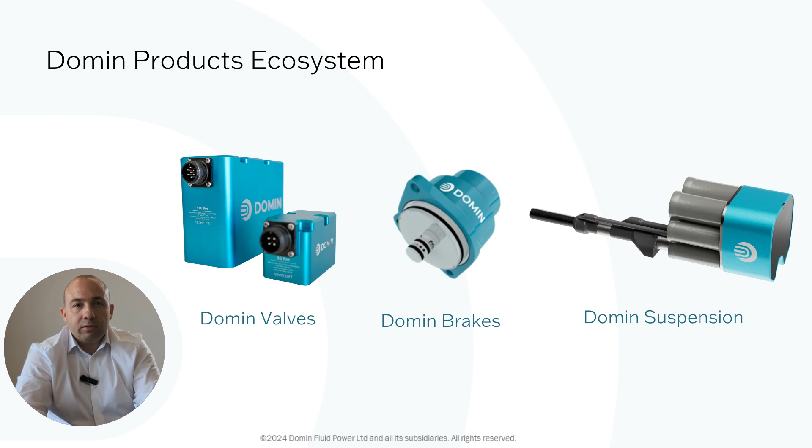But today we will dive into the detail of the Domin servo proportional valves. In the last 4 years, our workforce and production has doubled every year to meet the high demand for our products. To sustain this growth and maintain our high standard of quality, we have opened a new factory located just 20 minutes from the center of Bristol. At the heart of the Domin Technology Center is 3D metal printing.

Already in 2019, when Domin started large-scale production, we became the first company to produce a standard metal print product for industrial use. Now we are capable of producing 50,000 servo valves every year. Now I hand over to Cameron.

He will show you our servo valve products in detail. Thank you very much for the introduction, Alessandro. My name is Cameron and I'm one of the sales managers here at Domin. Alessandro talked about a few different types of products and systems that we're currently developing here.

But for today, we're going to be focusing specifically on our line of high-performance servo proportional valves. So today, we're going to explain a little bit about why we chose the servo valve to be our first product. Within the marketplace today, companies and customers have a choice between two competing types of technology.

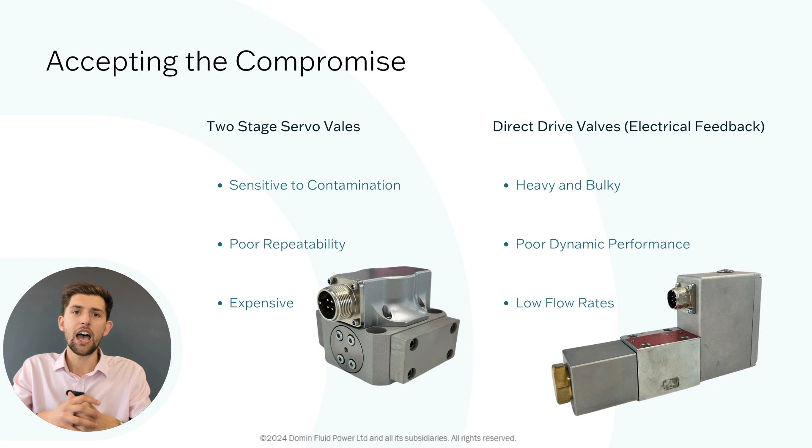So currently, customers and end users have a choice between two products and they have to accept the compromises that come with them. At Domin, we saw this as a great opportunity to harness advanced manufacturing technologies and new design systems and engineering methodologies to create a product that had the best of both technologies, but without the compromises. And this is where we are today.

We're able to provide a servo valve solution that has the performance and characteristics required both for the high performance environments and the reliability needed for the harsher industrial environments. On the screen here is our S6 Pro, which is our NG06 or D03 valve.

In terms of how this valve compares to an equivalent direct drive valve sitting on that pattern already available in the market, we've created a solution that is 70% lighter and is capable of step responses that are 67% faster, and at the same time operating at bandwidths with potential over 300% higher than what's available today.

Now at the same time as having this greatly improved performance, you'll see that it's substantially smaller. This valve, the S6 Pro for example, literally sits in the palm of your hand and is able to achieve a rated flow at 70 bar pressure drop that's 50% higher than what's available today. So moving from 40 litres per minute as the standard maximum rated flow on a D03 up to 60 litres per minute, which is a substantial increase.

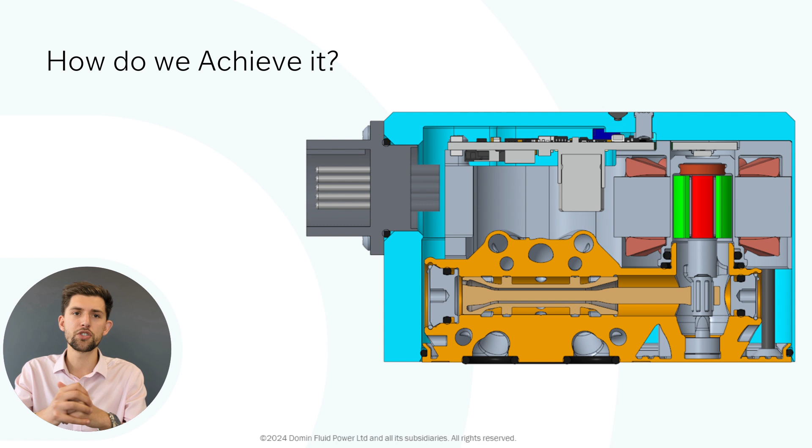So the next question really is, you've seen what's possible, it's how do we achieve it and what are those key contributing technologies? On the screen here, we've highlighted 5 key enabling technologies that have got us and the product to where we are today. The first being digital state-of-the-art electronics.

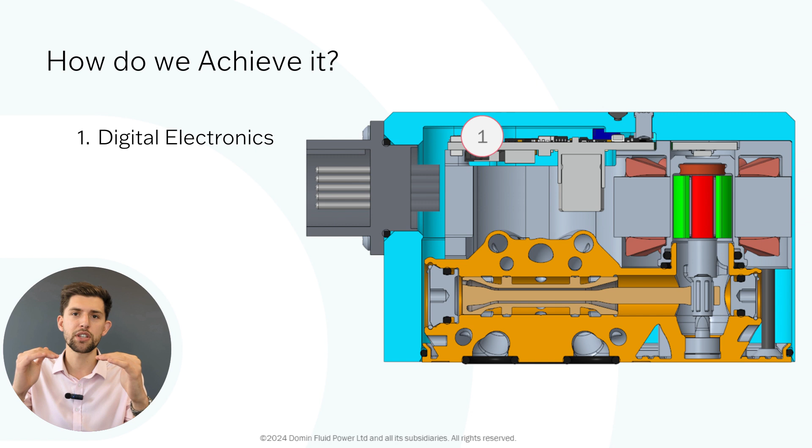So moving away from having large electronics housing on the side of the valve to a slim, very modular PCB approach that sits directly within the housing of the valve, as you can see on point 1 of the diagram.

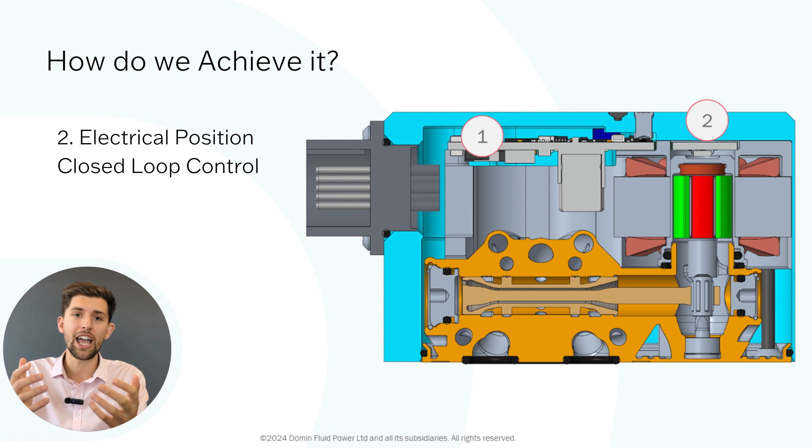Secondly, we've moved to an approach that harnesses electrical closed-loop position control using magnetic Hall effect sensors. Most direct drives today use large, bulky linear position transducers with relatively average resolution and performance, whereas we're able to harness the benefits of magnetic Hall effect sensors that are both very, very tiny, weighing only a couple of grams - on this diagram, for example, most of you can barely see it. At the same time as being so small, the resolution and control accuracy we can achieve is far greater.

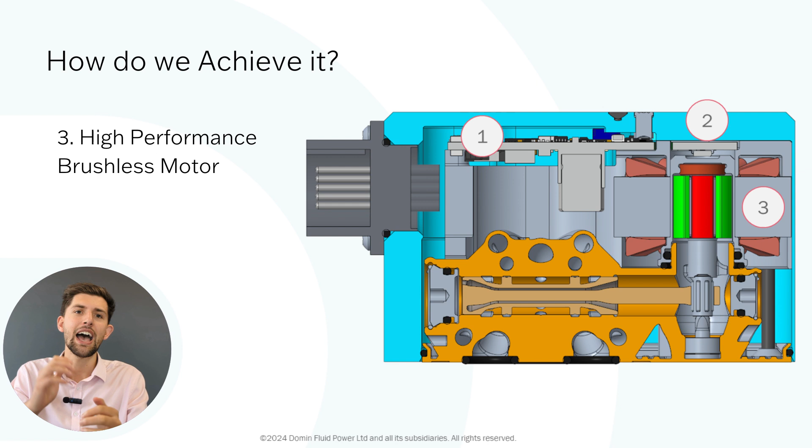The third key enabling technology is using high-performance brushless 3-phase DC motors as opposed to a solenoid drive, which is the standard today. These motors enable us to achieve a high amount of torque for the same given electrical input, which enables us to control the valve both at high pressures when the flow forces on the spool are great, and maintain accurate control at high frequencies.

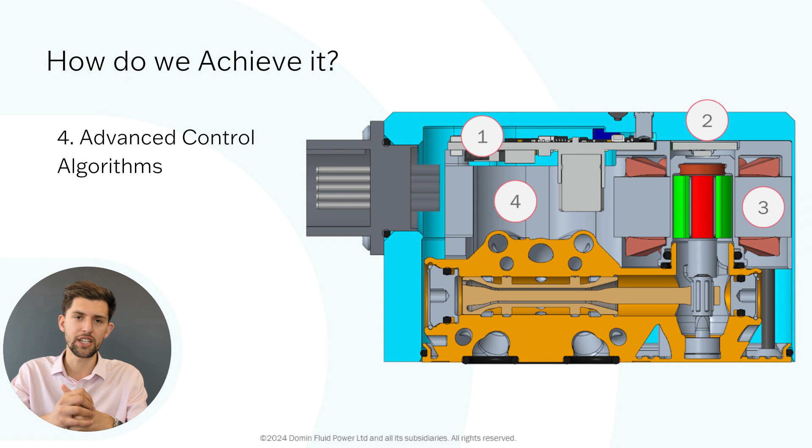The fourth point, which is linked to point 1, is our advanced control algorithms and firmware. These algorithms enable our products to keep up with the highest demands in terms of step input speeds and frequencies, to minimize overshoots and maintain very accurate, repeatable and precise control.

Fifth and finally, which is something Alessandro alluded to earlier, is our use of metal 3D printing within the valve. Within servo valves, we have a patent here at Domin which protects our use of additive manufacturing within a servo valve design. On this cross-section diagram, you can see the orange component, which is the manifold. This is one of the components manufactured using metal 3D printing.

You can see just by looking at the geometry of the valve itself, we're able to use simulation tools like CFD to determine the optimum flow galleries to minimize pressure drops and optimize flow rates. Thanks to the flexibility the manufacturing technology gives us, we can actually create and manufacture a design that is as close as possible to the optimal results using the technology currently available.

Additionally, something you might notice is the wall thicknesses are very thin within the manifold. So again, taking advantage of another simulation tool, FEA - finite element analysis - we can identify the minimum amount of material needed given the operating conditions and pressures the valve has to withstand, and then only print material that has functional properties, so withstanding stresses. As a result, there is very, very little wasted material.

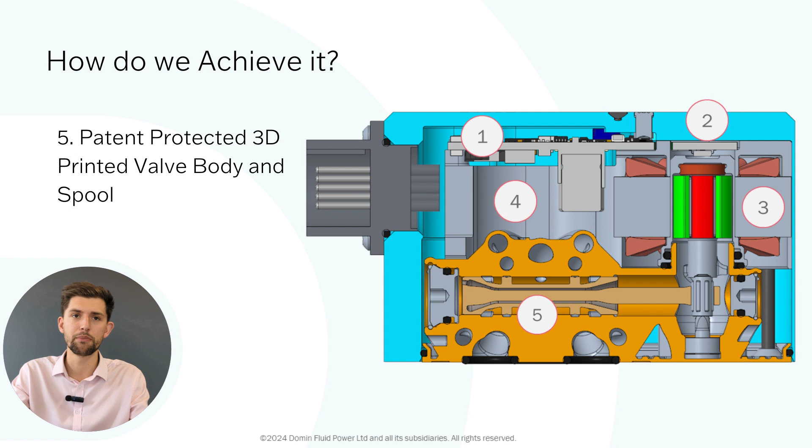So now we know we can create great products and we've explained how we do it. I think the next step is to talk about what this actually means for our customers in terms of outcomes. Over the past 5 years, we've supplied these valves into a wide variety of industries and applications, and we've seen approximately 3 key major improvements in summary.

The first, being something we've alluded to already, is obviously improved performance - so higher capabilities in terms of dynamic performance, flow rate, optimizing the size and the weight through our innovations, and advancing our product quality approach.

The second has been creating a product that removes failure-prone features and has very high contamination resistance, and as a result, improving the reliability of the product. For example, our products have no seals in contact with high pressure fluids, and we have no need for an additional filtration component. Additionally, we do not have a pilot stage. As a result, because we've removed these failure-prone components, our valves are lasting substantially longer in service and are proving to be very robust.

So because our valves are lasting longer in service, our customers are having to spend a lot less time and money on things like routine maintenance, repair, and flushing. Additionally, because the valves are longer in service, the machines can be more productive - you can create more with the machines, do things more frequently, and overall be more profitable as a company using our products.

Additionally, something we're going to cover a little bit later is energy consumption. Simply by removing the pilot stage, we're able to drastically reduce the leakage and reduce the power consumption of the hydraulic systems. For example, when replacing a 2-stage valve with the S6 Pro, an NG6 around 60 litres per minute in terms of flow, we convert this into energy savings just from reducing leakage. It equates to around $400 of energy saved per year per valve.

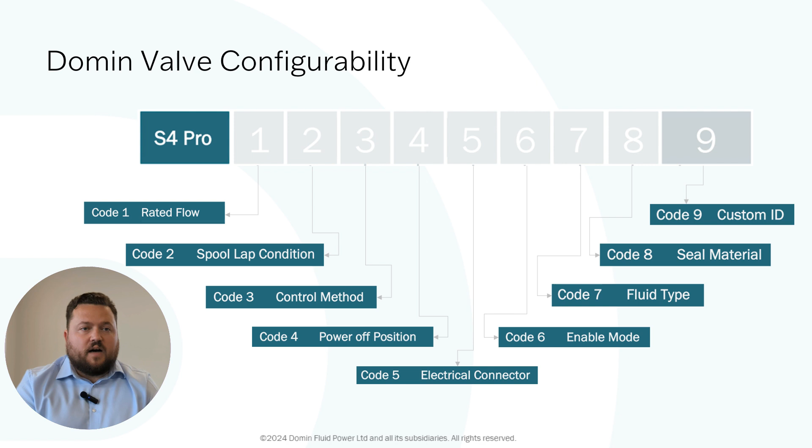So now we're going to take a closer look at each valve. Here we've got the S4 Pro. This is our miniature direct drive servo valve. This valve flows between 0.5 litres per minute and 18 litres per minute, and for our North American friends, that's maxing out at about 5 gallons per minute.

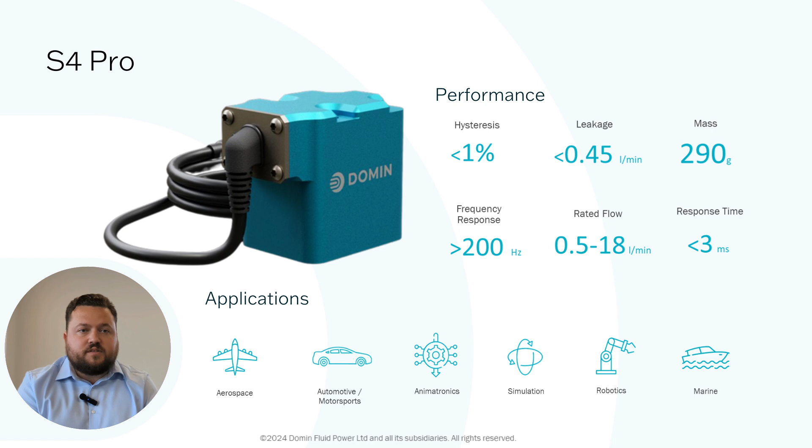It's a super quick valve, it offers a 3 millisecond step response time. To give you a benchmark of competing products, their step responses range anywhere from around 10 up to 25 milliseconds, so 3 milliseconds is super quick. In terms of application, any application where size and weight is important, the S4 Pro is a perfect fit. We've also had a lot of success in industries like animatronics, small robotics, simulation, and the marine industry.

And here we have our S6 Pro. This valve sits on the popular NG6 footprint. This valve flows from 18 litres per minute up to 60 litres per minute, and in gallons per minute, that maxes out at around 16 gallons per minute. It has a 3.5 millisecond step response, which is still super responsive, and this valve is perfect for your typical industrial applications, so anything from wood and metal processing to die casting and plastics.

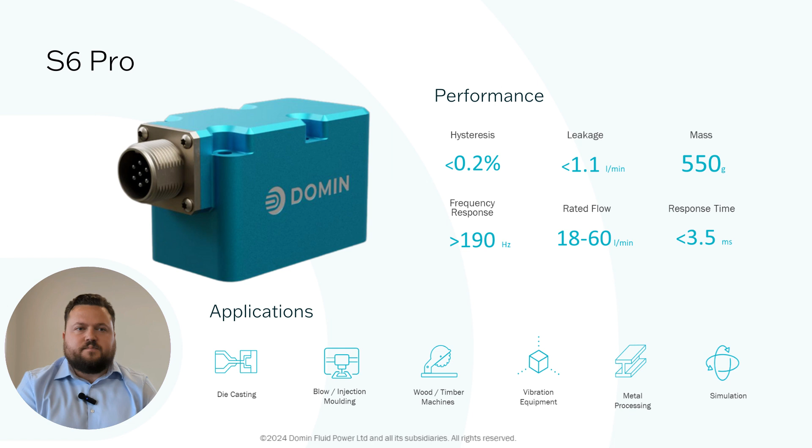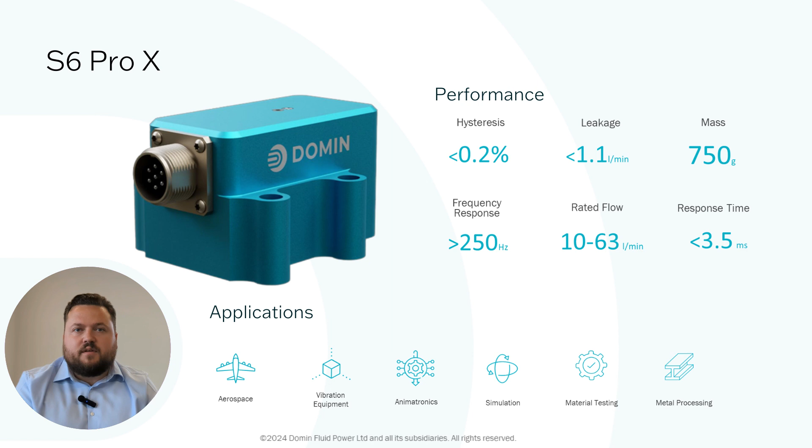The S6 Pro X is very similar to the S6 Pro in terms of size, weight, and dynamic performance. This valve can actually be tuned down to 10 litres per minute, and you can get slightly higher flow out of it, up to 63 litres per minute. But the response time and the rest of the dynamic performance is very similar to the S6 Pro.

And finally, we have our largest and the world's biggest direct drive valve, the S10 Pro. This is an NG10 size valve, and it is still direct drive, which is really impressive for this high flowing valve. We can offer this valve between 50 and 250 litres per minute. It has a 7 millisecond response time, and similar to the NG6 size valve, it's perfect for your typical industrial applications, but more for your heavier industrial applications in wood, metal processing, plastics, and hydraulic presses.

I will now pass you back to my colleague Cameron, who will go into some customer-specific applications and case studies. Thank you very much for that, Sam. Great to see an introduction to each of our products. Definitely one of the great things now about having this product range available and having lots of customers using these products out in the field is that we've got some really exciting stories to talk about.

What you can see here is Domin valves in applications such as die casting, testing, wood processing, power generation, and more. The great thing about having a product that can go both into industrial environments and high performance environments is that we've got some really exciting and even some niche applications to talk about.

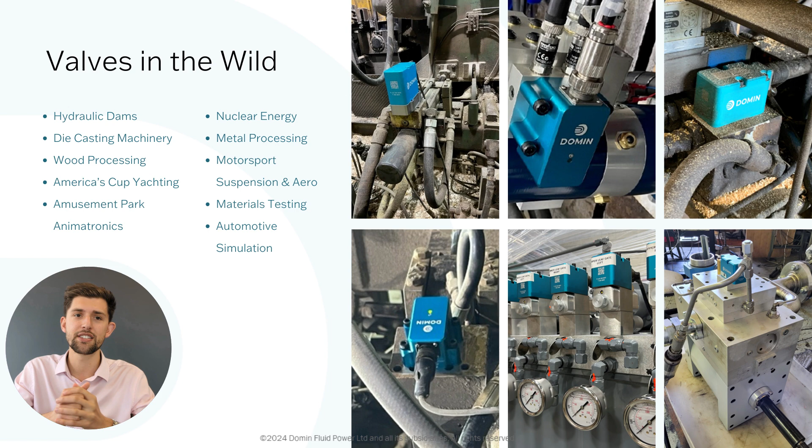Some exciting ones that jump out from the left-hand side are customers using these valves within motorsport, controlling things like suspension, clutch control and aerodynamics. We've also got customers using these valves controlling animatronics in amusement parks, and we've even got them on racing yachts, which is something we're going to cover in a few slides' time. So the first case study I think everybody would be very interested to hear about is one with our partner Visi-Trak.

Visi-Trak is a die casting OEM based in North America. They create die casting shot control systems for a variety of different machine builders within the die casting world. They've been building these machines for quite a long time, and naturally, as the die casting industry has begun to boom, thanks to things like automotive casting becoming more popular, the demand for these machines has increased. However, with their existing servo valve supplier, the lead times were increasing as well as the pricing, and there was the need for Visi-Trak to have a more sustainable solution that was in line with the growing trajectory of their business.

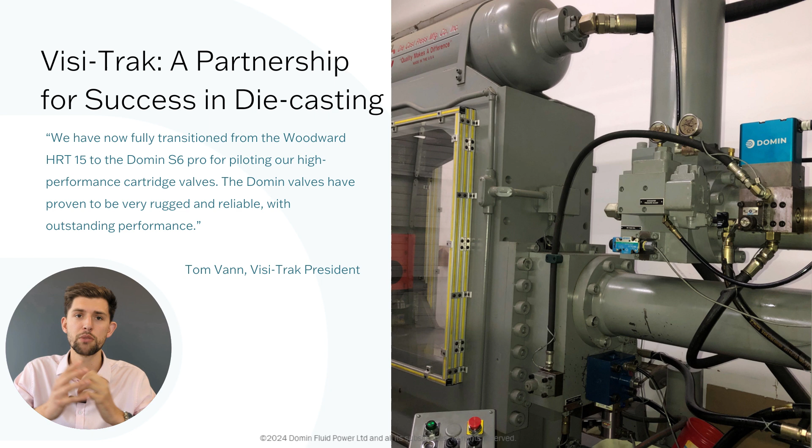So we approached Visi-Trak and worked together with them to provide a drop-in solution that was available on a much shorter lead time, as well as at a much more competitive price. We've now had a successful partnership with Visi-Trak for several years and have helped them to ramp up their production to meet the demands of the modern day industry.

We talked about reliability a little bit earlier on, but I think it's understated the importance of reliability in a variety of different hydraulic systems. This specific example is with one of our distribution partners called the Servo Group, who are based over in the United States. David at the Servo Group works with a lot of customers, primarily within the sawmill and wood processing industry.

So the end user at the mill were having to take the valves off, send them for repair, maintenance and flushing, and in the meantime, quickly source a spare part to put the machine back into operation as quickly as possible. So of course, this isn't a very sustainable solution, as it was costing them a lot of money in repair and maintenance and damaging the profitability and productivity of their business.

So through the Servo Group, we supplied our S6 Pro as a drop-in replacement to their existing solution. And our S6 Pro has now been working in this application for over 5 years with no issues, which is a great improvement from only 6 months.

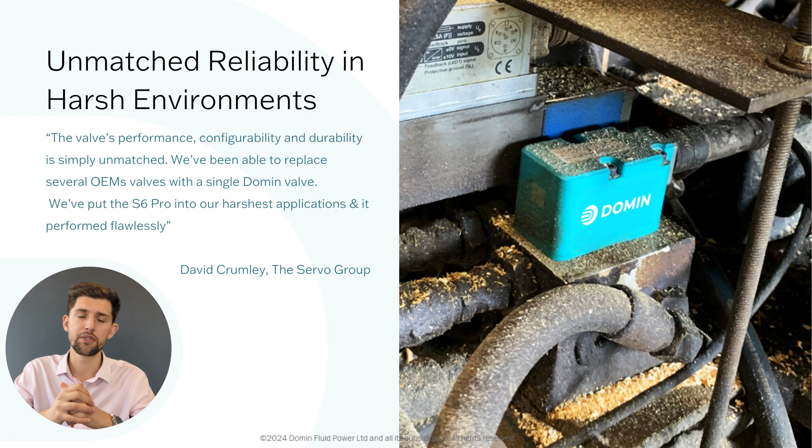Ineos build racing yachts to race in the America's Cup campaign, and the latest race is starting just this year. To get a competitive edge over the other manufacturers racing in the competition, Ineos were looking for a solution that would improve the power density of their servo valves, minimize weight, and maximize output to increase the speed of the boat and enhance their odds of winning.

So with Ineos, we together developed a custom S4 Pro solution specifically for them. We can't currently go into the details, but potentially once the races begin we can share a few more specifics. What I am able to share is that so far Ineos have been very happy with the performance of the valves, and we're really excited to see how they perform at the America's Cup starting in a few months' time.

So now that you've seen some of these applications and how we can radically transform systems for our customers, if you do see any similarities to something you're maybe already doing and want to talk about your valve solutions and how we could potentially meet your needs, please do reach out and get in touch.

And to talk about the future of Domin, our product roadmap and what's coming next, I'll pass you over to one of our excellent product owners, Jerome Carson.